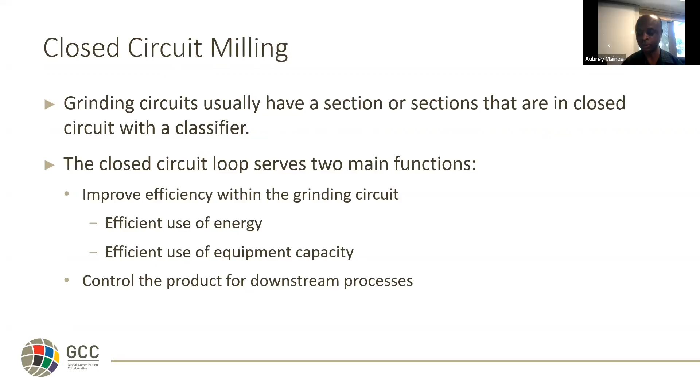When preparing this presentation, I tried to cast my mind to all the plants I've been to on Earth, which number in hundreds. I can't recall any plant that does not have a closed circuit loop. All the plants I could remember have a closed circuit loop. So it is clearly a very important subject to talk about.

So in closed circuit application, there are two things. One, it's a comminution device. Secondly, it's a classifier. So the question we want to ask is, why is classification important in these particular systems.

One is if you have poor classification, you will have energy wastage, and you will also reduce your capacity. So the classifier would help you in terms of energy efficiency and releasing capacity. Secondly, your recovery downstream, be it flotation, leaching, and so forth, will be compromised if your closed circuit application is not working well. And the point that we typically overlook is that if you have a poorly designed classifier, you will have unstable operations, so your circuit will not run properly. And then you may have numerous problems downstream.

And the one I've picked up here is those who do leaching and even flotation. You find that if the closed circuit loop is not working properly, you end up sanding up tanks downstream. And the tanks that we are referring to here include leach tanks, if your operation is leaching.

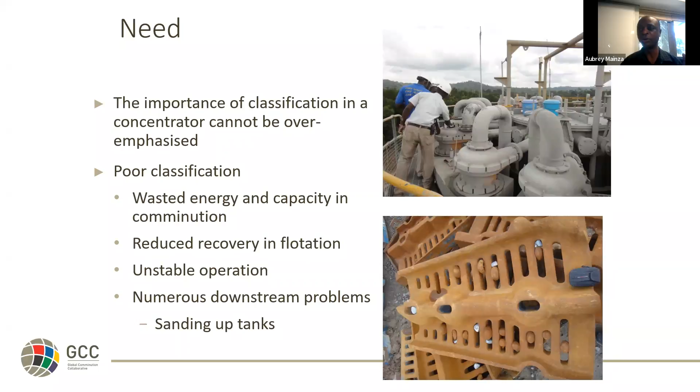I had a very good photograph to show you, but the owners of the plant didn't want me to highlight it. So silting of the tanks is a big problem in leaching, and it comes from the closed circuit grinding loop not working well. You send coarse particles downstream and it causes that. Flotation tanks also silt if you send very coarse particles. And the sump right at the end of the ball mill or the single stage SAG mill can also sand up if the closed circuit loop is not working well. So it is a key area that one should focus on.

So for efficient closed circuit applications, we need to look at two key things. One is the type of grinding and the classifier chosen - the equipment that you have in the circuit is critical. Secondly is the design of the circuit, how the equipment links together. You may have very good equipment for your circuit, but if you don't link them properly, then your system will not work well.

The other element to look at is, assuming that you have correctly sized your grinding mills, correctly sized your classifiers, and linked them well in your circuit, the other important element is the way they are operated. By this we mean the control loop that drives your circuit. So the control of this becomes a key issue.

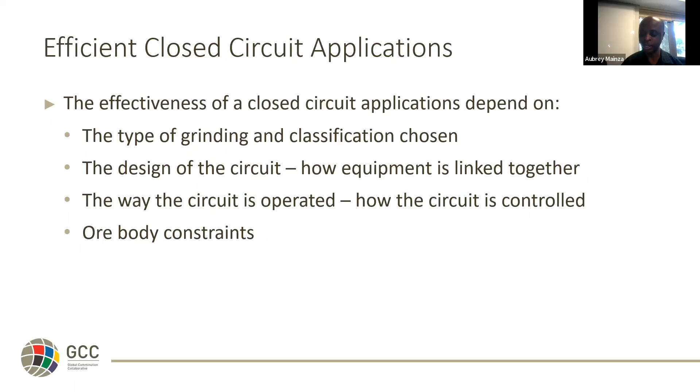And then lastly, all of this has to be done within the constraints of the ore body. Remember, we don't choose the ore - the ore determines how we can process it and how we can engage with it. So three key things: correct selection of equipment, correct linking up of this equipment in the circuit, and how you control it. All of these actually define how a closed circuit application would work.

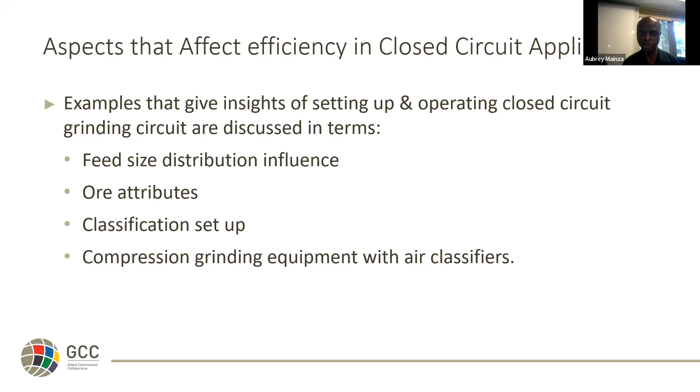So in this presentation, what I've done is I've selected typical plant examples just to help us define the insights of setting up and operating closed circuit grinding circuits. We are going to discuss this in terms of where you have a feed size influence, where you have the ore attribute influencing your system, where you have your classifier - what does it do and how can you harness the advantages of certain classifiers. And then lastly, we will look at the compression grinding equipment with air classifiers, and what we can learn from that. So those are the four examples that will orbit our presentation around.

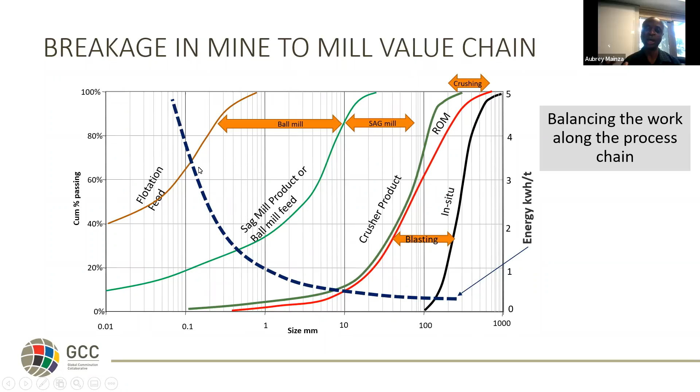Before we go for the examples, I borrowed this from the workshop we did with Malcolm way back. This actually captures the grinding business very well. For instance, we have blasting, which is the first part of comminution. Then we have the run-of-mine ore, which we can also crush to give us a crushed product, or we can use a SAG mill after that, or crushers, to give a feed to the ball mill. The ball mill gives us the product that we send to flotation or leaching or whatever we use. But if you look at the energy involved, blasting uses very little energy, and the energy increases as you reduce your size. So in terms of energy efficiency, we typically look at this side of the particle size spectra - this side, the energy equation is very forgiving, but once you go on this side, it's very aggressive. And unfortunately, this is where milling happens, and this is where our discussion centers.

The overflow goes to leach. Then from the ball mill, it goes to another set of cyclones, and the overflow from there goes to leaching. The underflow is recycled to that ball mill.

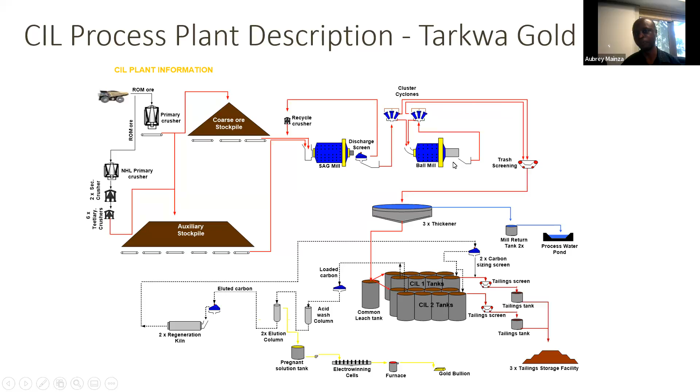So why are we talking about this example? Well, at one point they had a very high throughput, meeting their nameplate throughput, and their feed was relatively fine. But when they changed the mining method, they went to what they called a coarse feed. The grinding circuit performance plummeted. They could not meet their throughput, and they were grinding super fine.

There were two schools of thought on site. One group thought the ore was harder or more competent than what they mined before. The other school of thought, which I subscribed to, was that the ore was exactly the same. However, the blast was different, so there was an issue with the feed size distribution.

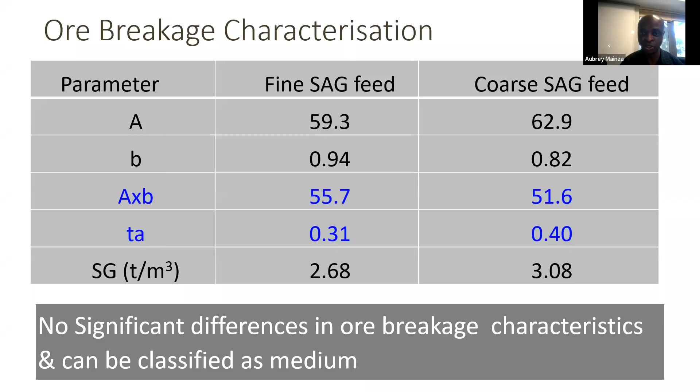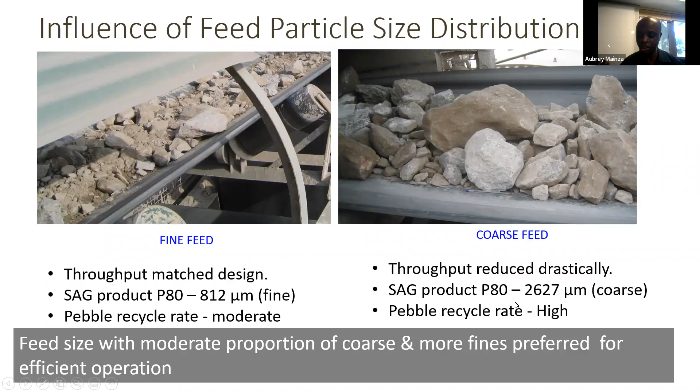So the question is, how would you set up a classification system or closed circuit system to help you when receiving such a product? Well, their classifier was robust enough, because remember the SAG mill product went to a classifier, and only the underflow went to the ball mill. So the ball mill product went to a different classifier. You can easily tune it so that the product quality is the same.

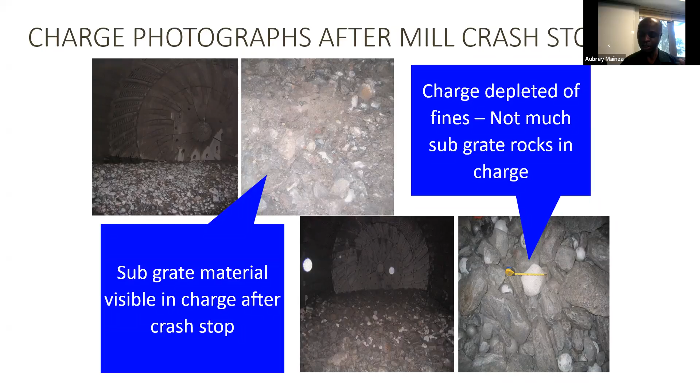And this is exactly what they did at this operation, or what we worked to do. So the nameplate capacity was 1,500 tons per hour. Before they changed the mining method, they were doing 1,600 tons per hour. After changing the mining method, 1,200 tons per hour. This represented a huge loss in terms of income.

Then we also instituted, because they couldn't change the mining contractor, a pre-crushing stage to reduce our feed size. After we did that, they went to 1,760 tons per hour. The mechanics of what we did and how we did this are a subject for another day. Today we just want to emphasize how you utilize the closed circuit application.

In this particular circuit, we ensured that we tuned both sets of cyclones so we could have a consistent product. You can see from the product here, the circuit P80 was almost identical—it didn't matter what we did to the feed. The percent sub 75 microns was right where we needed it. So this system showed us that irregardless of what the feed would be, you can retune the circuit to give you a consistent product.

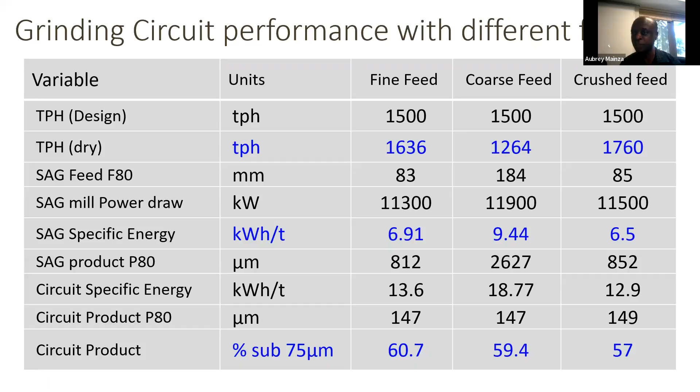This is after optimizing the classifier and the mill together for that feed. Before that, the plant was struggling to even do 900 tons per hour. So after readjusting the closed circuit loop, the plant was able to release a bit of capacity within the feed constraints to produce the material that was desired downstream.

And these are the PSDs from the system. The leach recovery was around 93–94% for all the surveys that we did with those different feeds and

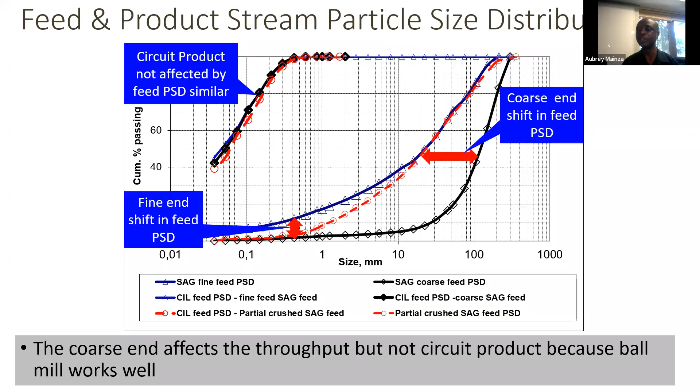The second one I want to look at, we are still staying in West Africa. This is a single stage grinding mill. Single stage grinding mills are actually preferred in certain plants, but for these mills, they rely on one mill to produce the final grind. So you don't have a second mill. The system that has a grinding mill and its classifier would produce the final product.

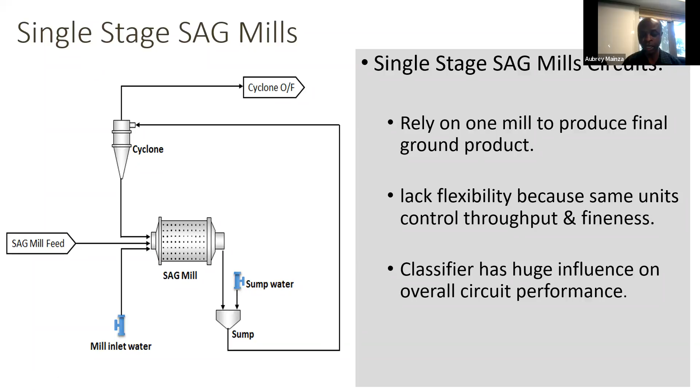It lacks flexibility because you have to control both the grinding mill and the classifier for you to actually get the circuit to work well. Both the throughput and the fineness of the grind are controlled in this closed circuit loop. So the classifier in this circuit has a huge influence on what you do, and a lot of effort should actually be put into organizing how your classifier does the reject and the accept.

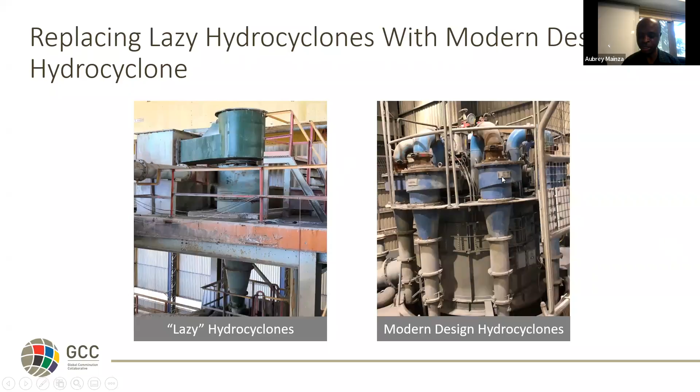I'll give an example in another gold mine here in South Africa. In this gold mine, initially they had what they called lazy cyclones, and these lazy cyclones were used to perform your classification. Later, they replaced the lazy cyclones with more modern cyclones. This is just a picture to show how a modern cyclone looks like. It was a different design, but a more modern design that they had applied.

The advantage of a more modern design is that most of them use a bit of CFD to see the flow, so there's no flow disturbance within the system. And because there's no flow disturbance, it gives you a fairly good cut size, and the balancing of the material within the cyclone is done properly because there's no mixing that induces breaking out the classification that you've done.

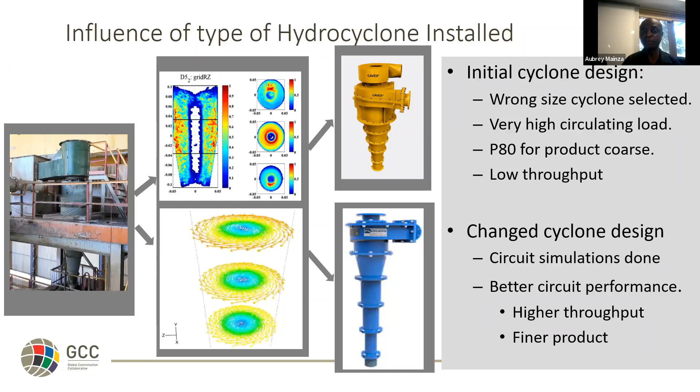In the initial design, there were two things: one, it was the wrong size, very big, and secondly, it promoted very high circulating loads. The product from the circuit was coarse and the throughput was lower. So when they changed the hydrocyclone design to a more modern one, they had better performance both in terms of throughput and fineness of the product that went to the leach circuit.

Here are some of the specifications for that particular plant. It's a small gold plant. Initially, with the original design, they were doing 115 tons per hour. Just by changing the cyclones, they went to 145 tons per hour. You can do the maths—this is a huge improvement.

The energy consumption was barely the same. The circulating load, look at this, reduced from 440% to 340%. This is a huge reduction, but the win came here: the product size reduced from 100 microns to about 80 microns, and the leach recovery moved from the mid-80s to mid-90s, which gave them more money because of this.

The other thing that happened, other than just changing the cyclone, was to also change the control. The control for the circuit was changed. For instance, the grinding mill looked more at the load as a primary control rather than the power, which was the initial case. And then for the hydrocyclone, they looked at controlling the flow to the hydrocyclone at a consistent density. This resulted in this huge gain in the performance of the plant.

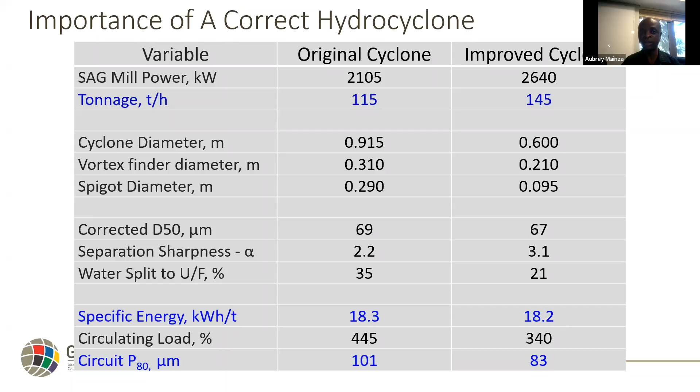The first one would be the design of the grate. The second one would be the feed that you are introducing into the grinding mill. And the third one is an incorrect design of the classifier. All these three can cause slurry pooling.

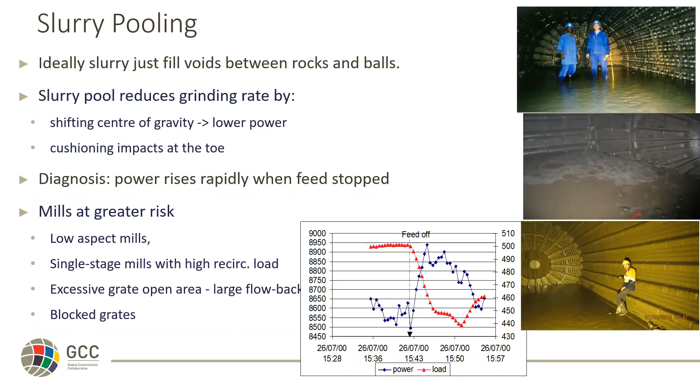In this particular grinding system, one, we have an inefficient set of cyclones, then secondly we had an efficient set of cyclones. So the throughput for the inefficient set of cyclones was 775 tons per hour. Just reducing the circulating load from nearly 600% to 300%, you could see they had a gain in throughput and a gain in the grind.

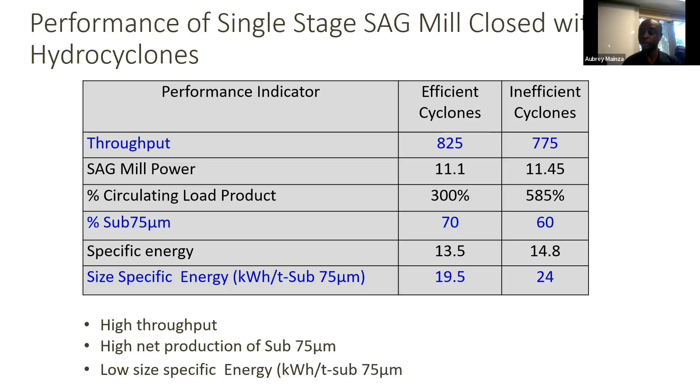What I did not mention here is the silting of the tanks actually completely stopped because they had that problem. The bigger gain was in the grind that they achieved, which released capacity, and also the leach was performing better in this particular system.

Okay, so the next example I wanted to look at is a system where you could replace hydrocyclones with screens. We are looking at how two different classification systems fare. Let me just plug in my computer.

So the hydrocyclones usually are forgiving because they can accommodate a wide range of conditions. They are very low on maintenance, and they can match a wide range of throughputs. For a given hydrocyclone, if you look at the volumes that it would allow, it is quite a high range.

But they are inherently inefficient because they rely on the hydrodynamics to effect the separation. Some particles would always bypass into either the overflow or the underflow. The coarse particles would bypass, go into the overflow, and cause problems downstream. The fine particles would be trapped and follow the water to the underflow, which represents inefficiency and may lead to overgrinding.

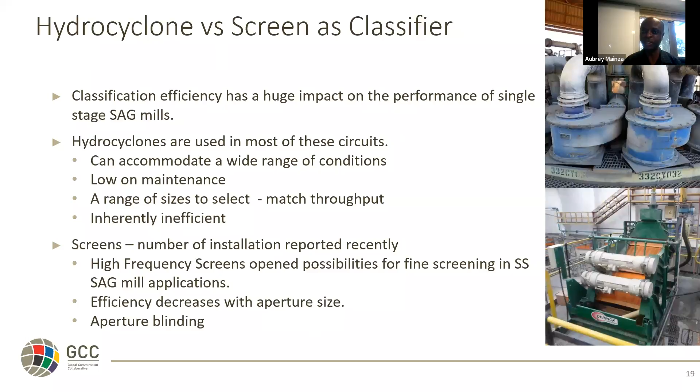It's been shown, and I may show a slide here, that efficiency decreases with aperture size, so as you go smaller the efficiencies decrease. Then there is also a problem of blinding of apertures. These are all issues you encounter with screens. In short, the decision whether to use a hydrocyclone or a screen depends on what you want to do, because they both have limitations and they both have strong points.

This is an example from one of the gold mines in Namibia, where the hydrocyclones were actually replaced with screens. What you would see here is that the closed lines and closed markers represent the hydrocyclone, and the open markers represent the screens.

You could see that in terms of the final product, the screen had a coarser product compared to the hydrocyclone. If you look at the SAG mill product, this single stage SAG mill product, the screen was fine at the fine end, but coarse at the coarse end.

Typically one would say both systems had very little, plus 1 millimeter, in the downstream circuit. But what you would note is when we had the hydrocyclone replaced with the screens, the throughput went up to 140 tons per hour from 126 tons per hour, and the product was coarser, as I said earlier. The circulating load reduced from 160% to 45%. Screens usually run with very low circulating load. The energy was almost the same. And in terms of footprint, it wasn't an issue on this plant because they had spare space where they could put screens.

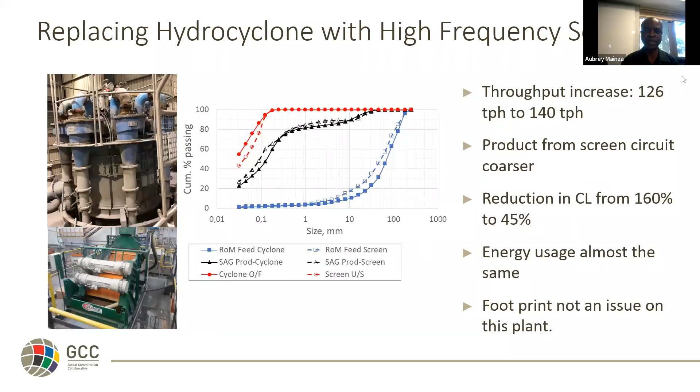So the one element I wanted to bring up is that when you run particularly high frequency screens, you need to be very careful with the percent solids that you operate them at, because the efficiency of the screen decreases as you run at high solids content.

So you can see here the alpha decreases with the increase in feed percent solids to the screen. This was for different tonnages. We ran experiments at 9 tons per hour for a small Derrick screen, all the way up to 19 tons per hour. So when you increase the throughput on that screen, the efficiency decreases. The reason is the material forms a layer on top of your screen, and any material that has to reach the aperture has to percolate through that layer. It acts like a bed, and you have to percolate through to reach the bottom of the bed in order to be presented to the aperture. That is why we have this reduction in capacity.

We also did this with three different aperture sizes. So what you could see is that for the smaller aperture, the D50 decreases with increase in feed, and so for the bigger apertures. But again, if you run at very high tonnage, the effective aperture is reduced because of the load that you are putting on the screen.

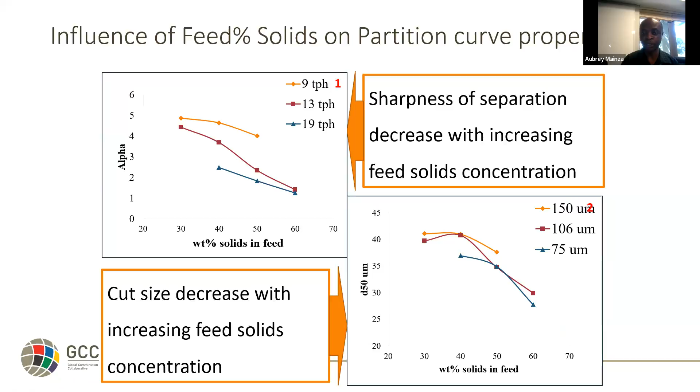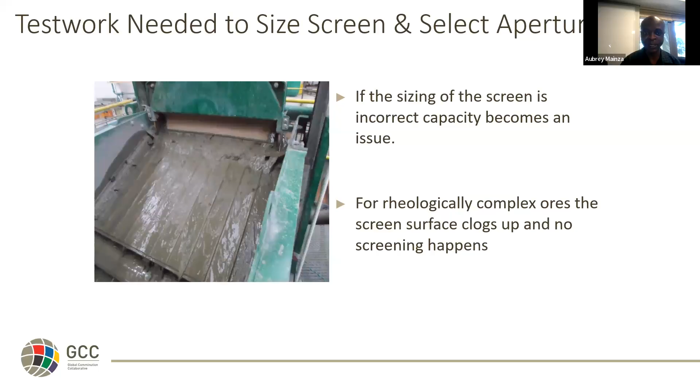The other problem is this is not a high frequency screen, this is a standard screen. The apertures for this particular screen were just under 1 millimeter. You can see it's clogged up, and the reason for this is the screen could not cope with the throughput. And if it doesn't cope with the throughput and it clogs up, then the whole plant has to stop.

And the cause for this clogging up could be: one, a higher throughput than the screen can handle; two, the spray bars not spraying well, which compromises the whole screen. But the point I wanted to emphasize is if the screen fails, the whole plant fails in this closed circuit. While we don't pay much attention to screens, it's one of the things we should be paying attention to. Where you have screens, do not use process water in your spray bars because they clog up easily, and once that happens, the whole plant has to stop on a simple thing like spraying over the screens.

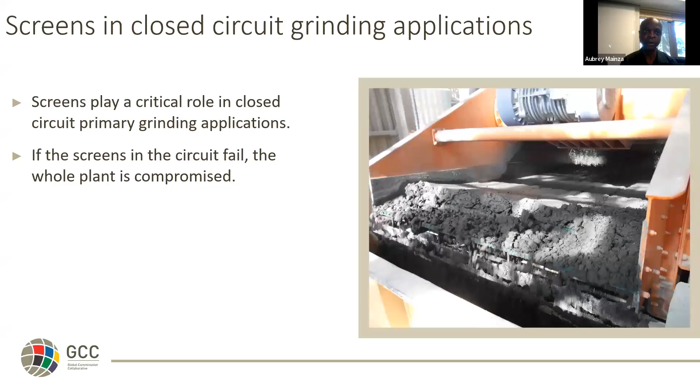The second topic I want to look at now is the ore constraints, and I've picked my favorite ore for this topic, which is the UG2 platinum ore. The UG2 platinum ore has two constituents. The first is chromite, which has a high SG, typically about 4.8. Then it contains silicates, which has a low SG, typically 2.7, but because of the contaminants in the silicates, you can get silicates and compounds that go with it at about 3 SG. These coexist in the same ore.

Since this is a platinum ore, the PGMs are associated with the silicates. The chromite is barren, but you need to effect your classification and recovery in the ore that contains both. If you purify your chromite properly and recover it at high purity, just the sale of the chromite in this particular ore can give you money to run the whole plant. Basically, the PGMs would be a profit. So it's important to separate out the chromite so it's a sellable product, and then the PGMs associated with the silicates.

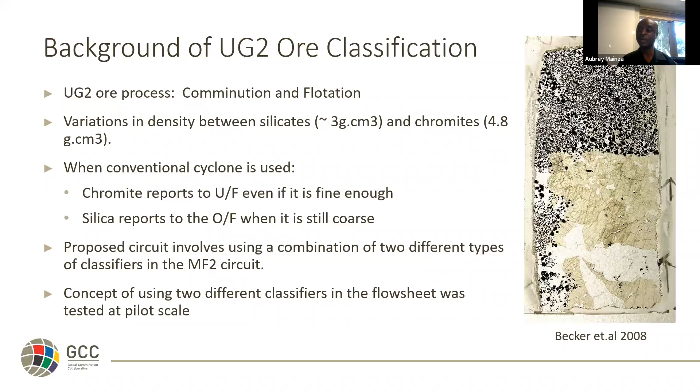But today we want to focus on that loop on the secondary grinding. Here, the capacity depends on how efficiently you can classify in that cyclone. That cyclone controls the quality and the reduction of overgrinding.

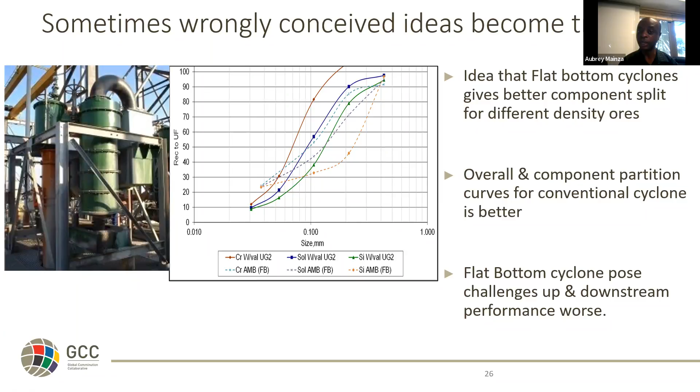We used a screen. The middlings went on the screen, 100 micron apertures. The oversize was reground, and the undersize escaped and was floated together with the other product.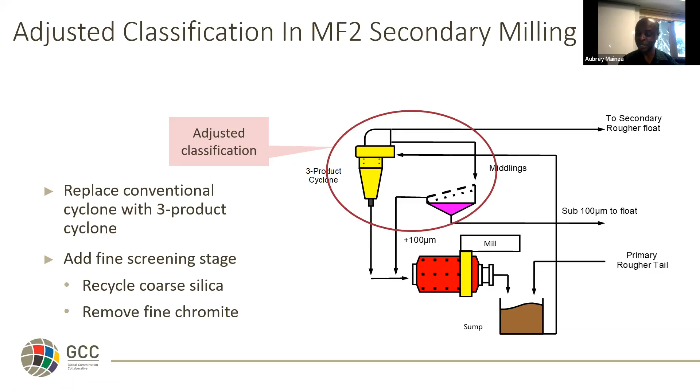Because of this system, it adds one unit as opposed to just one classifier, which is the screen in that particular case.

This is just a picture of the 3-product cyclone and the schematic. I already explained what it is. You can see it's got 2 vortex finders. The one overflow comes through here and the other overflow comes through the other one. This is just a picture of the actual cyclone in operation.

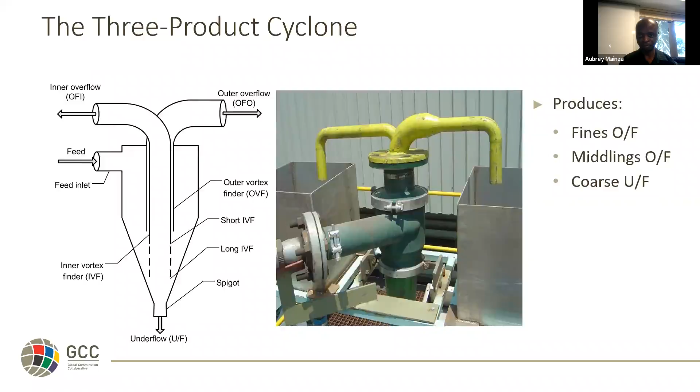When we looked at the flotation results, it showed that the 3-product cyclone was much better in terms of the recoveries, the total recoveries, and no penalty in terms of the grade.

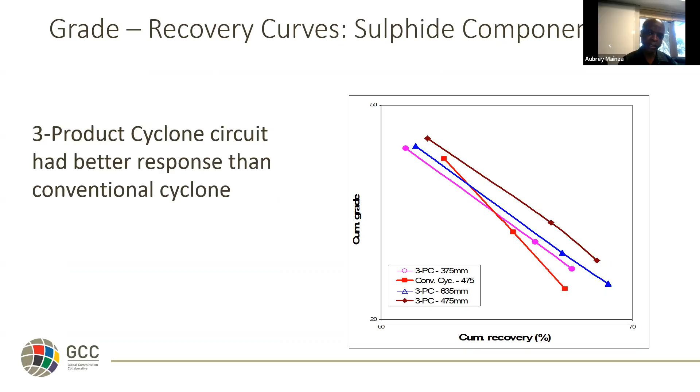You can see this is the conventional cyclone. The recovery was much lower compared to that of the 3-product cyclone. These are just different conical sections of the 3-product cyclone, and the grades were almost in the same region. So that was a better system compared to the conventional cyclone.

And this is why: the 3-product cyclone had more liberated particles compared to the conventional cyclone. Even those attached to sulfides were more and they could be recovered. Even those that were partially locked into sulfides were more and they could be recovered.

But those attached to silicates and other siliceous materials that could not be recovered through flotation were fewer. You can see the conventional cyclone starts to dominate in those particle regimes. And for those that are completely locked in silicates, there were quite a lot, and this is what explained the loss in recovery.

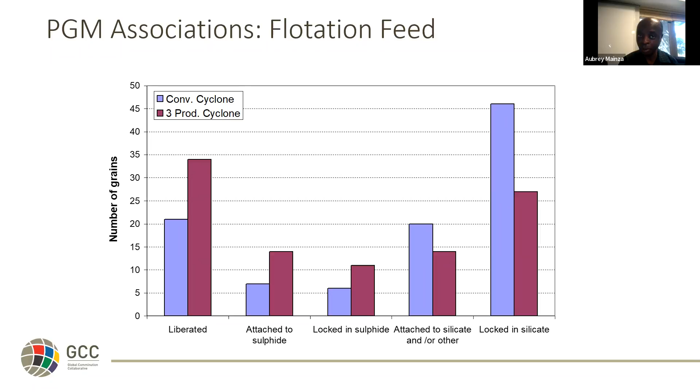So this is one system that you could use in your closed circuit grinding application to get around the ore constraints imposed by the chromite and the silica in the UG2.

Still the same circuit, we can also do something different. We don't just have to introduce a 3-product cyclone. We can go open circuit.

So by rearranging, instead of having that classification the way it is, we can do something different at that node, because it still controls the product quality and reduces overgrinding. If we focus for a minute on reduction of overgrinding, then we can do something upfront.

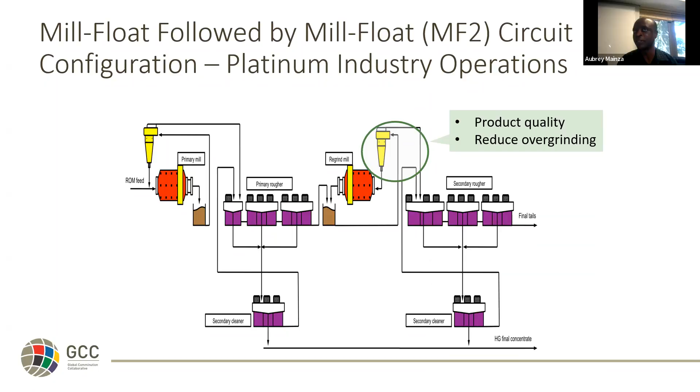And this is the circuit here, exactly the same circuit. We haven't touched the primary, but the primary rougher tail goes to a densifying cyclone. From the densifying cyclone, the overflow bypasses grinding. The underflow is ground, but this grinding mill is now in open circuit. It does not require any closing classifier to achieve exactly the same result.

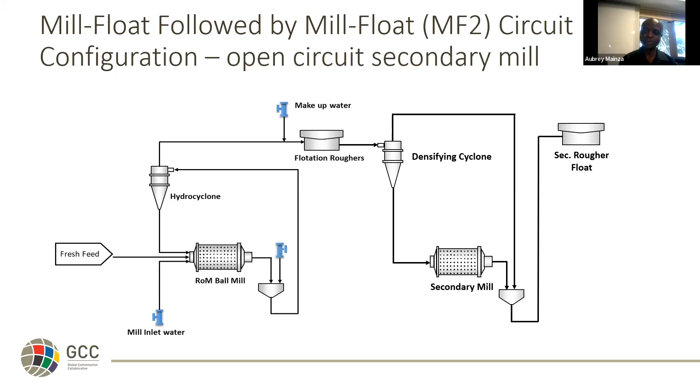Well, many doubting Thomases would say, where is the data to show that this could work? Here is the data from a real plant.

You can see in this particular circuit, after changing the cyclone, we were doing 280 tons per hour in the primary. So this is fresh feed, crushed feed. Then after the first recovery, the overflow from the first cyclone went to about 260 tons per hour. Then from there, in the secondary circuit, we introduced 260 tons per hour.

But look at what happened here. The densifier underflow was 228 tons. So about 32 tons or so bypassed the grinding circuit, and we were only introducing material that needed to be ground into that densifier.

And the result is we were able to meet the percent minus 75 microns needed for that particular circuit to affect our recovery. And this circuit worked just well.

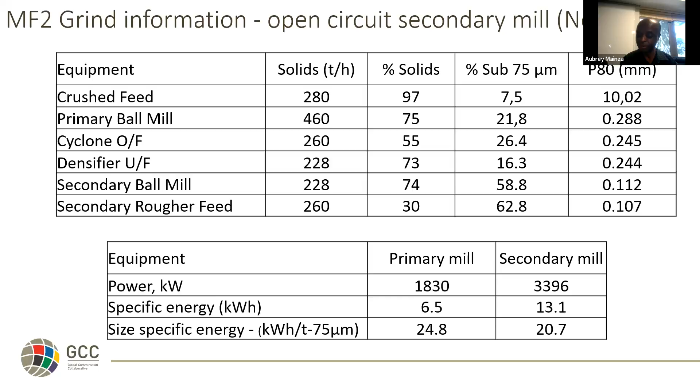However, be warned, the densification cyclone had to be tuned carefully so that the solids going into the secondary ball mill were at the correct percent solids, and also the fines were completely depleted, and it did the trick. The recovery numbers showed no penalty in the recovery.

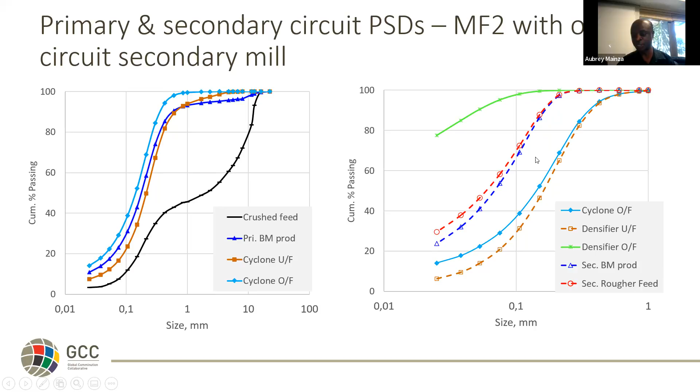And when you combine with that densifier overflow, this is what the secondary rougher saw as feed, and it did the trick.

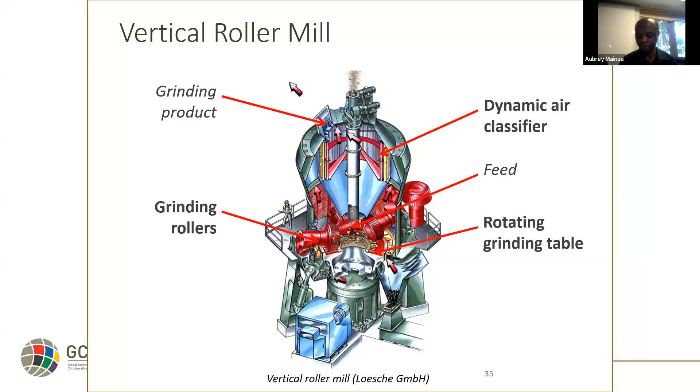The last part I want to quickly look at is, even when you have compression grinding operating in closed circuit, the same rules apply. This is a vertical roller mill operated in closed circuit with air classifiers, and this is from Warren Little's work.

So a schematic that illustrates what is happening here: this is a grinding table, this is where you do the grinding. These are the rollers, and the material is fed on the rollers. When it's ground, it's air swept and goes into the classifier. There is a reject stream from the classifier, and the product goes that way. The beauty with this is when you control the flow rates correctly going into that air classifier, you can actually control the cut point.

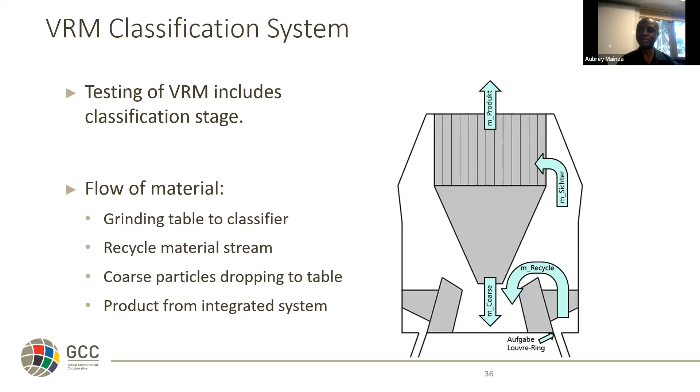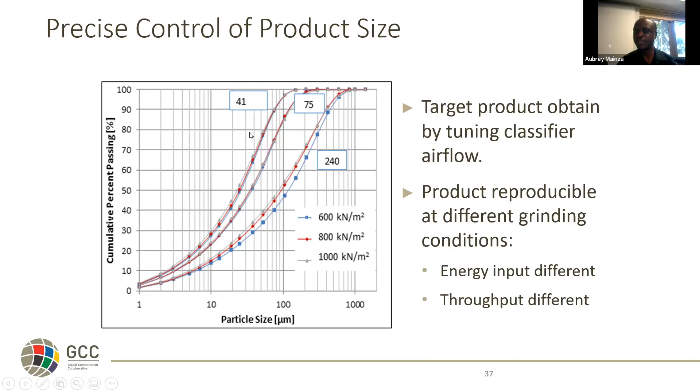In Warren's work, he was able to control this — we needed to replicate, can we use this closed circuit for primary grinding, secondary grinding, and tertiary grinding? From his work, he was able to do that. You can see these are the PSDs, and these mirror primary grinding, secondary grinding, and tertiary grinding. All of these were subjected to flotation.

You can see here the energy split from van Drunick, that the air classifier takes between one third and 20% of the energy split when you use an air classifier in such a system.

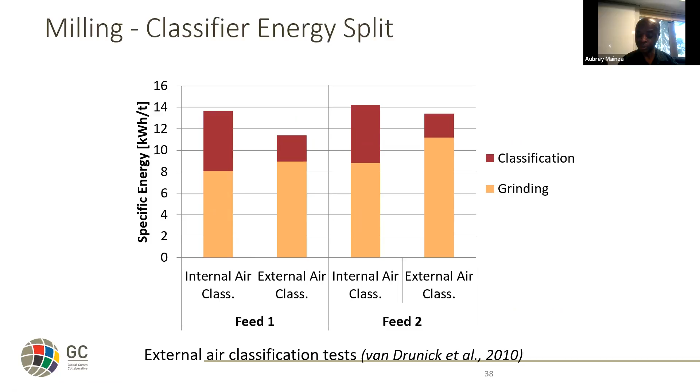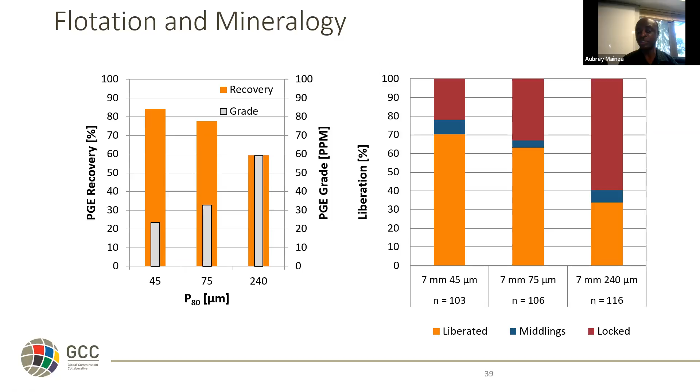But what is good here is you can precisely get the product that you need in terms of tuning the airflow rates to your classifier.

So the goal when we use closed circuit grinding applications is: can we recover the material? Can we have sufficient capacity? We can also look at the Tromp curve — as long as we are within where the Tromp curve allows us to recover the material, we are okay. If we can minimize the energy, let us push our product, like we did in terms of screening, to slightly coarser. As long as we can recover all the values, that is okay.

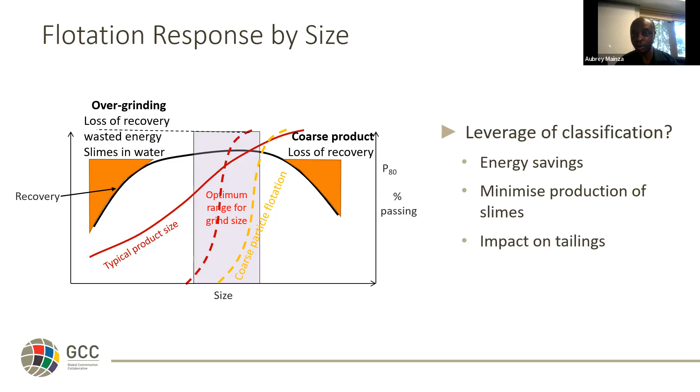A lot of work has been done on this, and Grant Ballantyne and a student called Yuan did a lot of work on this, and they've shown beautiful graphs that show even if your product from the screen may be coarse, when you look at the material of interest — in their case silver and lead — it came out liberated and they were able to recover it. So that would be the goal: to look at can we recover it, not how coarse or how fine our grind is.

By way of concluding, closed circuit applications are very important. We can't escape them in our mineral processing, whether it's gold, platinum, or copper. It is very important — they are always there. So how can we optimize them?

We need to look at both the feed size distribution that we are feeding and tune our classifier to deal with the feed that we have, tune our mills to deal with the feed that we have, because the feed is king — it influences everything that happens downstream. And the Tarkwa example I presented shows that it is doable.

We can tune the mill and the classifier, and we can get exactly the product that we want. Look at the classifier as well — while it does not consume energy, it does have an influence on energy, throughput, and grind quality. Screens give advantages in terms of energy and capacity by minimizing recycle loads, but one should also look at the footprint, and they have failings when it comes to very fine apertures. Then the VRM — you can tune the classifier there to give you exactly the product that you want, and you can get good recovery out of it.